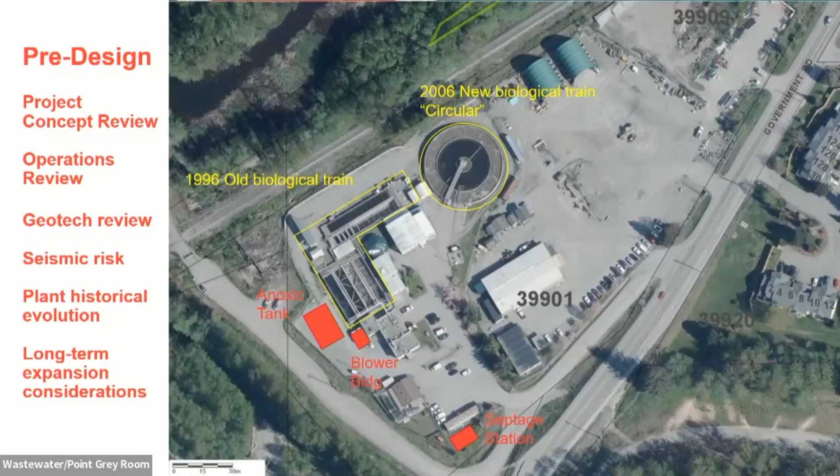To summarize, out of all that preliminary design work, these are some of the conclusions we came up with: there were many expansions over the past 50 years, and creative engineering solutions by various designers were employed to reuse infrastructure and adapt it at low cost. It was very creative, but as a result it ended up with a real patchwork of different systems that were hard to further expand.

Also, there was quite a large turnover of district staff within the engineering group and operations group, even within our project scope period—two senior operators came in and left, which makes it challenging with turnover. We also identified that the existing project, the anoxic tank, carried a number of concerns, and maybe it wasn't the best approach to take.

Finally, seismic liquefaction is a significant concern in this plant area. With the new building codes and seismic conditions, it drove some decisions that were different than what was originally envisioned in the detailed design project.

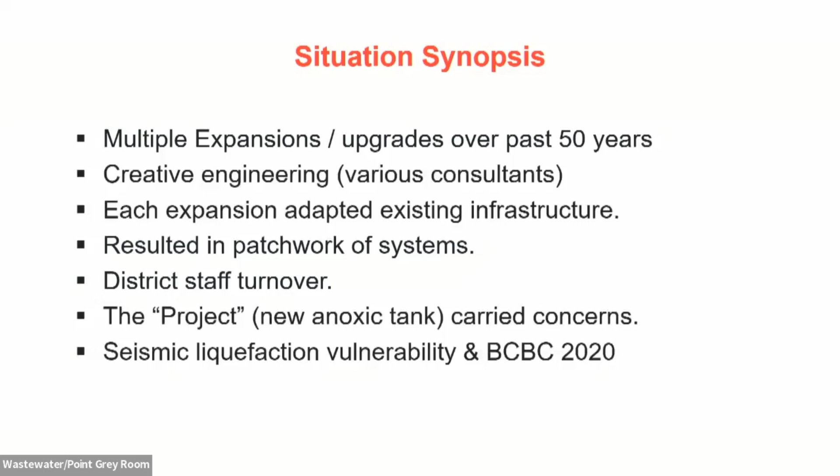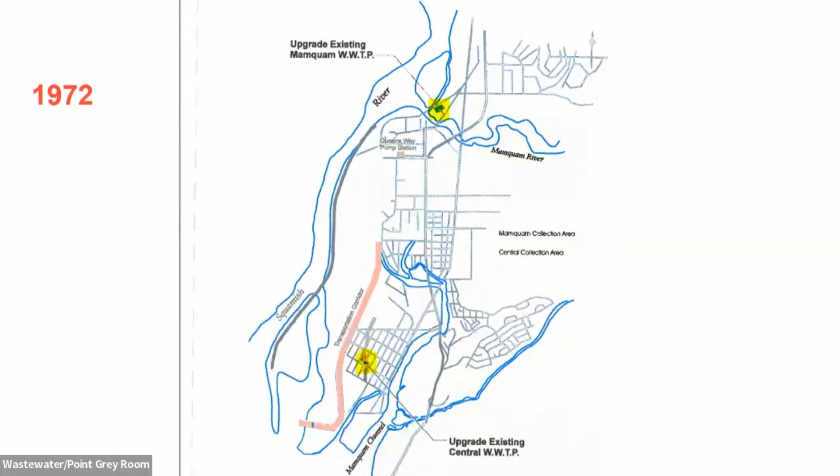I'm just going to take you through a bit of a history lesson of the plant that we unearthed through the investigation. Back in 1972, the district had 2 treatment plants, one at Central downtown, and one up at Mamquam. The Mamquam plant is the one we're talking about in this assignment.

Both original plants were similar to this one here at Mamquam. It had an aeration tank fed by a screw lift pump station. After the aeration tank, it went to clarifier cells and then to sludge digesters on the outside. Sludge went to a sludge drying pond, and the effluent went to a chlorine contact tank and then out to disinfection. The control building was located here, and that was how the operators kind of managed the facility.

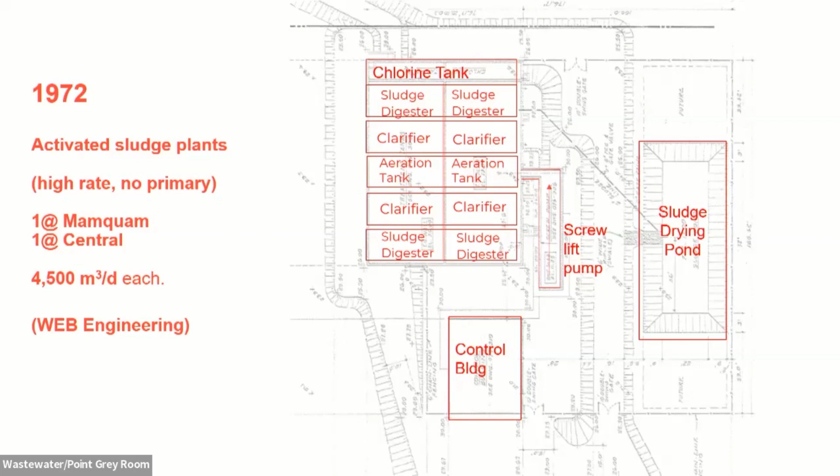The plant was rated at 4,500 cubic meters a day, and this operated for quite a number of years in both those facilities.

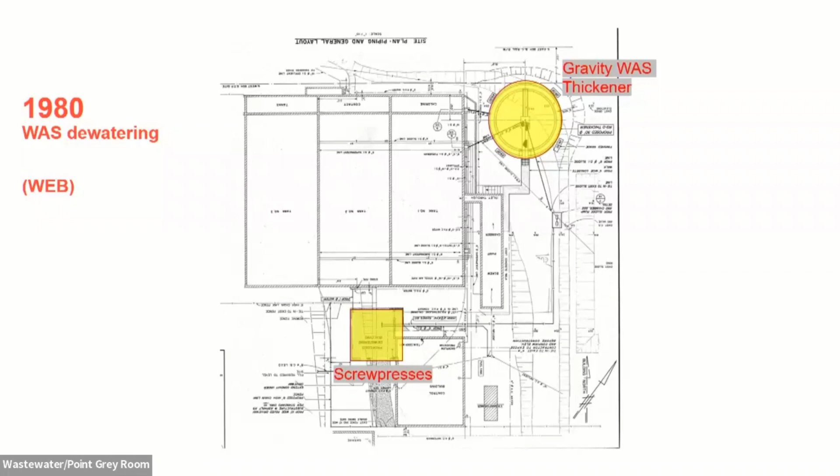Then in 1980, the same engineer that designed the original facility did an expansion upgrade - well, it wasn't an expansion, it was an upgrade. A gravity thickener was installed up in the right-hand corner, and a screw press was installed, so the sludge was thickened and then dewatered with the screw press.

Then in 1996, another consultant got involved in a capacity upgrade. At that time, the original treatment tank that was here was totally revised to become just aeration tanks, and new clarifiers were built up across the top.

The control building was added to with another part for the electrical components, and this part was raised because it was discovered at that point that the flood elevation was actually higher. The screw lift pump station was converted to a screening and grit removal facility.

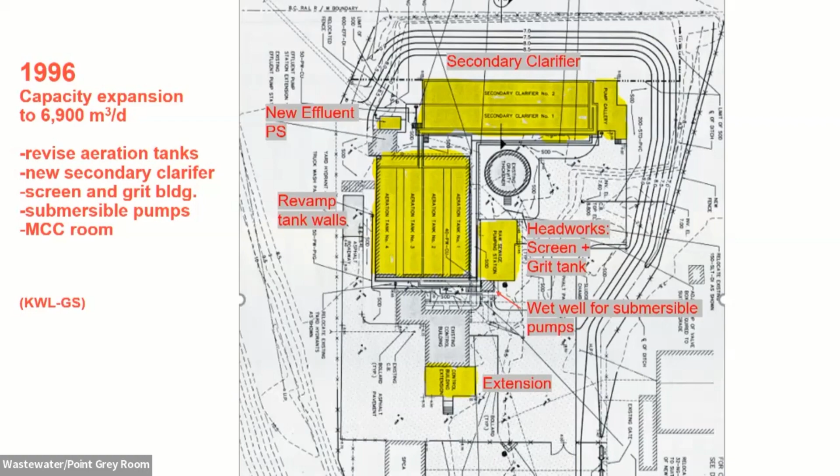Just to illustrate some of the innovative work that was done, this here was the old screw lift pump station - here's the bay for where the screws were. This was modified so that a submersible wet well was put here and a submersible pump was put in.

It pumped the sewage up to the screens at the top level of the screw lift pump station, went through the screens - there was one duty screen and one manual bar screen - and then came out a new channel that was built on the side of the building to bring it back to the aeration tank.

Along the way there was a grit chamber right here, so it came out through the screens, out to the grit chamber, and then out to the aeration tanks.

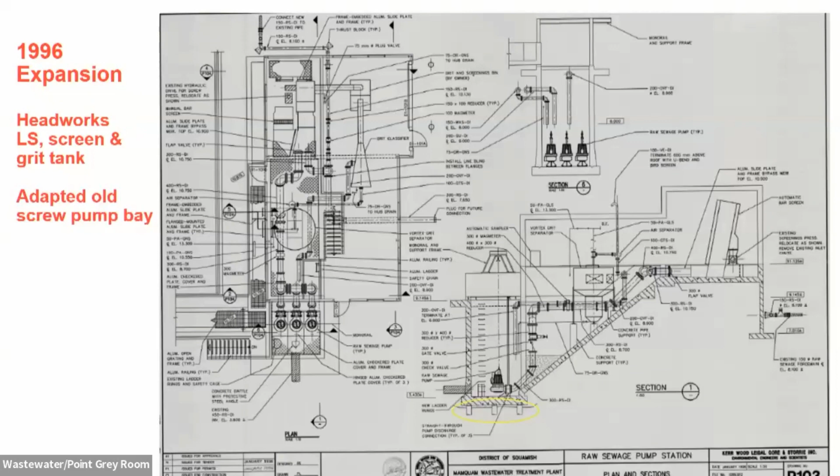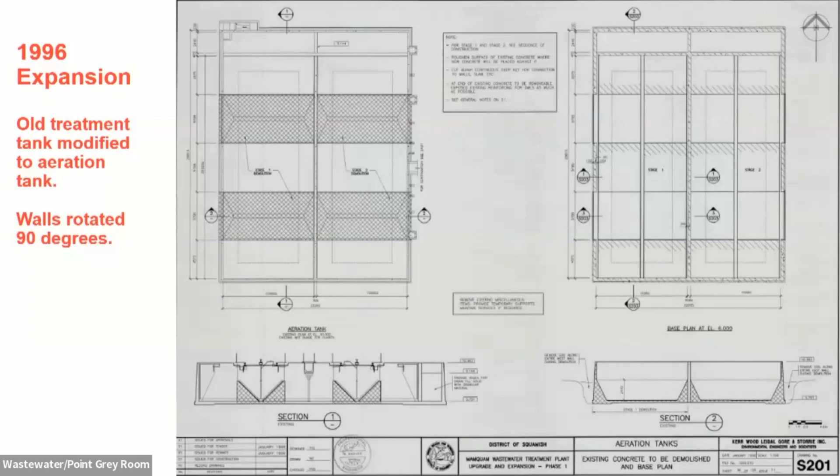These aeration tanks are modified - it used to be combined treatment with the aeration and clarifier. The clarifier had these benching bits of concrete, and those were saw cut out. All the horizontal walls that went this way were cut away, and new walls going in that orientation were built. So that aeration tank, 50 years old, has been modified considerably.

The concrete was getting towards the end of its useful life, and it was designed to a very different standard 50 years ago than the standards now for post-disaster requirements.

So the original concept of adding a new anoxic tank to work with that tank had some questions in it. In addition, the secondary clarifier that was built in 1996 would have had to be retained in order to fulfill that concept.

There were even greater problems with retaining the use of this secondary clarifier. First of all, it was a very shallow clarifier in a rectangular shape, and it didn't have good flocculation, so it was more suitable as a primary clarifier really than a secondary clarifier.

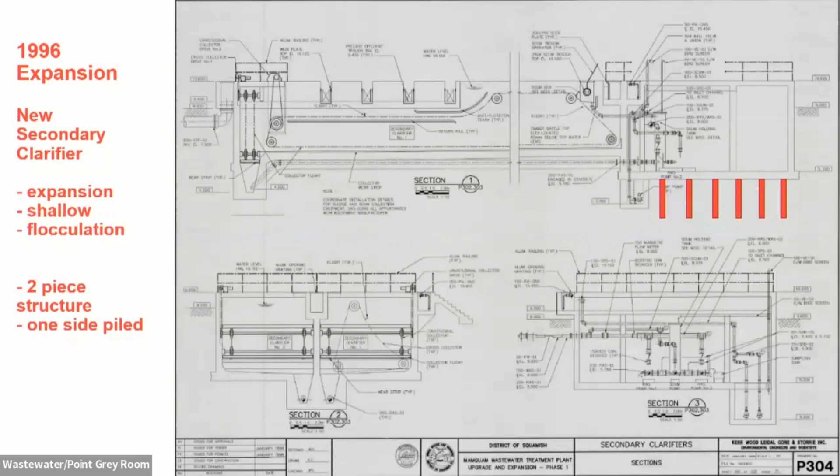But the other half of the tank is just sitting on the soil, and it's connected by a piece of rubber. So in a seismic event, one piece is going to react much differently than the other piece, and it would most likely split apart. That posed quite a risk in terms of continuing to use this infrastructure.

About 2006, the district undertook a design build expansion. In that project, the central wastewater treatment plant downtown was decommissioned and replaced with a pump station that pumped all the sewage from downtown over to the Mamquam facility, which was upgraded to take a larger capacity.

Back in that era, 2006, the federal legislation that had ammonia toxicity concerns was introduced. With that concern, this new circular unit was designed to be able to nitrify, meaning the clarifier was built with extra capacity to increase the MLSS to have nitrification possibilities.

That one also incorporated a selector zone in the bioreactor. A selector zone allows you to create organisms that settle better. Through the use of an anoxic zone, we pick the bacteria that want to settle well and avoid filamentous organisms, and that worked quite well, so it became a favorable approach to continue using going forth.

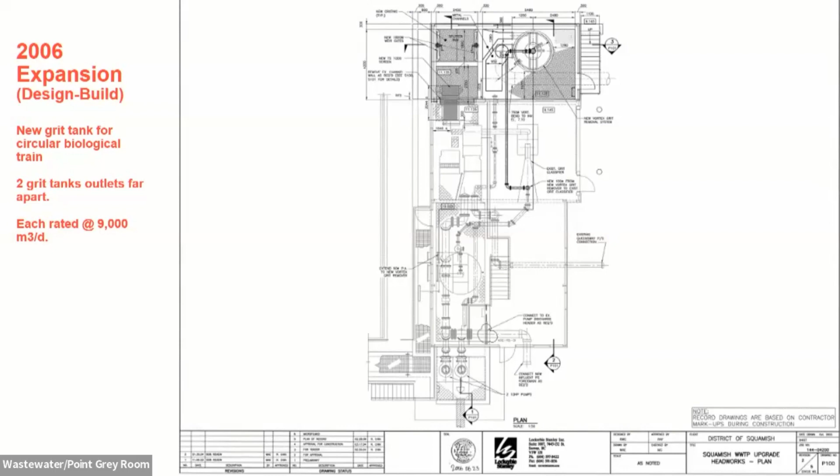In subsequent years there were other upgrades done. The last one, this upgrade, was done by a design build team, Lockerbie Stanley, and it was rated for 9,000 cubic meters a day.

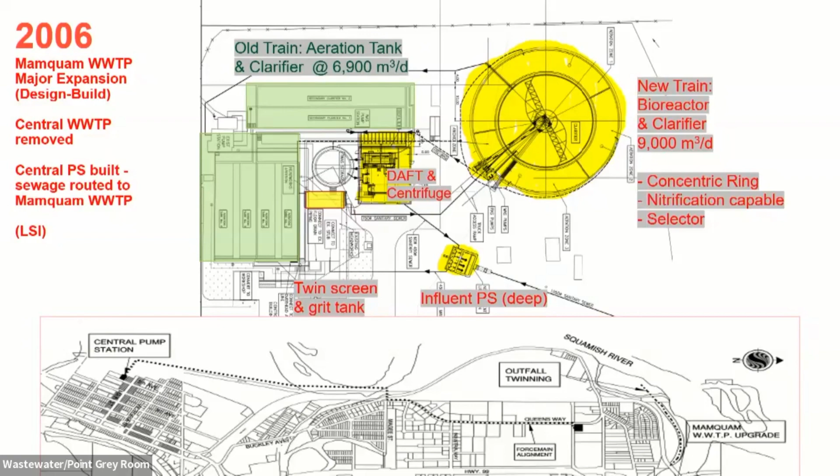Just comparing the footprint, I wanted to highlight that the new yellow is 9,000 cubic meters a day versus the green there, which is 6,900 cubic meters a day. It shows some differences in footprint using superior technology, deeper tanks, and selector technology.

Then a number of other upgrades took place, done by various consultants. The district put out RFPs for each project, and whoever got it, did it. There was headwork screening, screen replacements, centrifuge replacements and twinning, and UV disinfection.

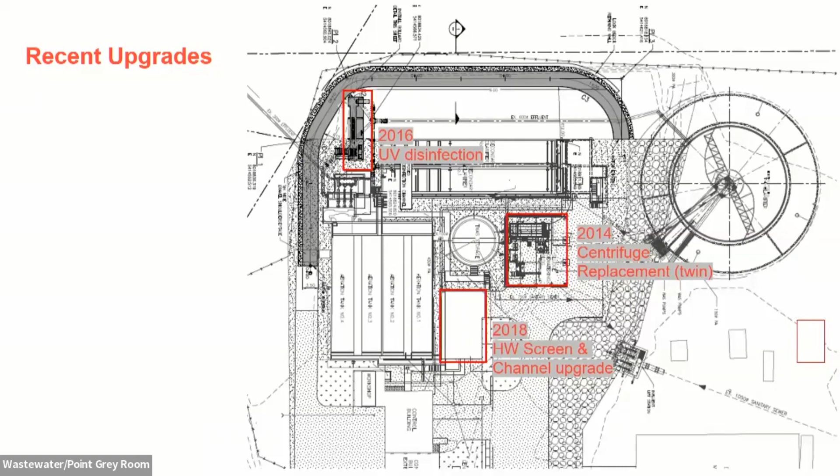Now going back to the preliminary design work of the scope that I got involved in, we did a geotechnical review, did some boreholes, and also reviewed the old boreholes and geotechnical information from the past, which was pretty consistent. There were liquefiable layers within the site, two of them, that in an earthquake situation would turn into mush and cause settlement.

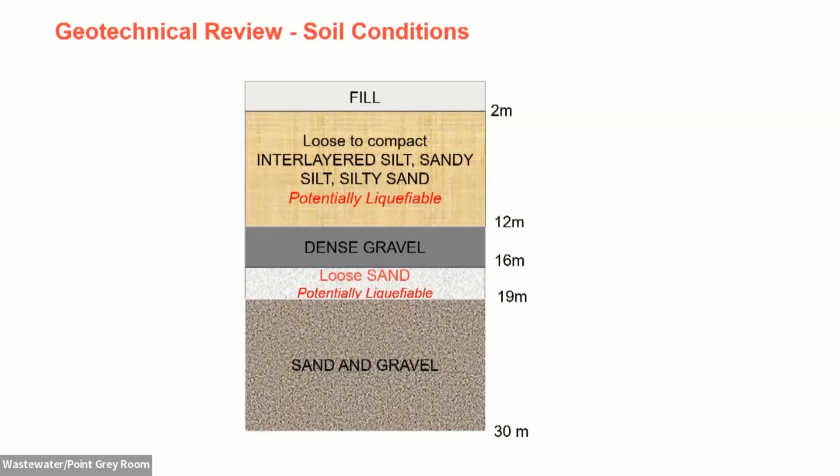This was known before, but back then the design codes were not as tight, so there really wasn't ground improvement done. But at this stage, where the codes really require very small crack allowances in the concrete, we have to go to ground improvement to reduce the movements we need to incorporate.

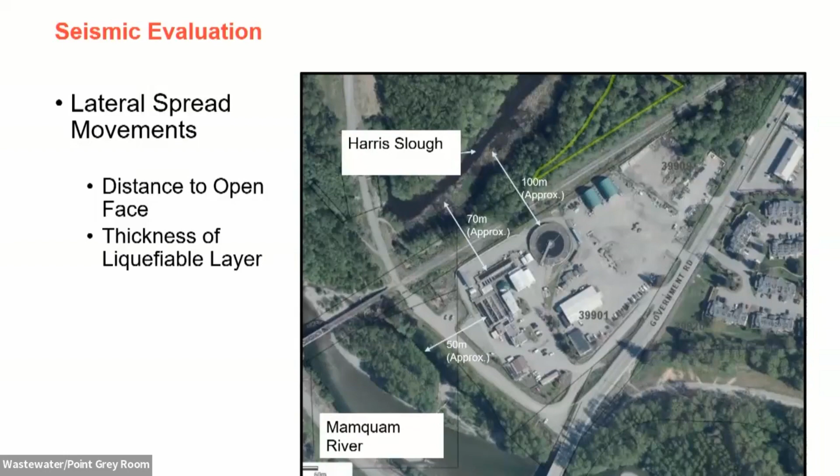We did a seismic investigation of all the existing structures. That meant looking at each structure and predicting how much it might move and what might be the consequence of each structure. That involved looking at the layer of liquefiable depth under each structure, as well as the distance of each structure from an open face. Those were the factors that determined how much movement there would be.

That information was summarized, and we identified some high-risk buildings. The existing rectangular clarifier was one of those high-risk items.

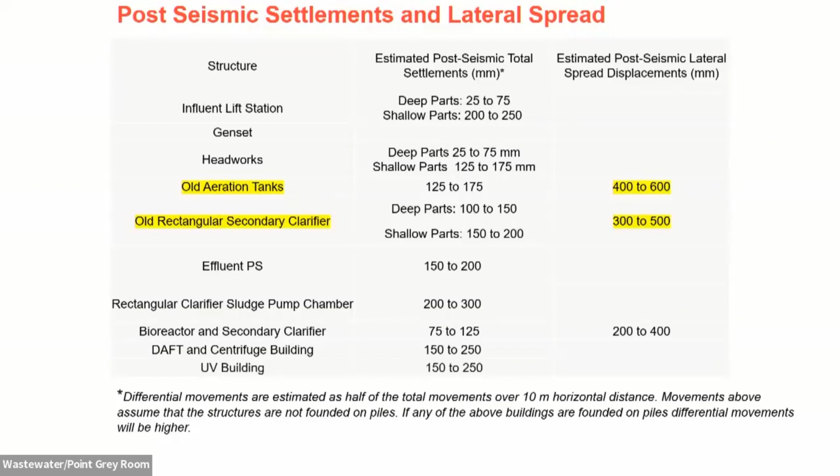So to summarize the pre-design findings, the concept of adding the anoxic tank to the old train really wasn't a good path to go down. We'd also looked at process intensification rather than building anything at all, just taking the old tanks and putting in some media to get higher treatment capacity. But that wasn't a good idea either because of the vulnerability of the existing facility.

The recommendation was to actually build a new concentric bioreactor and clarifier. The plant was happy with how that one was operating and they were familiar with it, so it seemed like a good option to undertake. That new construction would have ground improvements to make it seismically resilient.

But we identified that it would be possible to take the existing secondary clarifier, a rectangular one. While it wasn't performing very well as a secondary clarifier, it was built and paid for, and could be relatively easily adapted to become a primary clarifier.

In doing that, we could get a low-cost way of extending the biological treatment capacity. We would remove roughly 30% of the BOD using an existing tank, and that wouldn't require aeration to degrade that BOD. The settled solids could then be centrifuged directly, and primary solids dewater much better than secondary solids. So that would improve the dewatering of the solids, reduce the amount of polymer required, and give a higher solids content cake to reduce trucking costs.

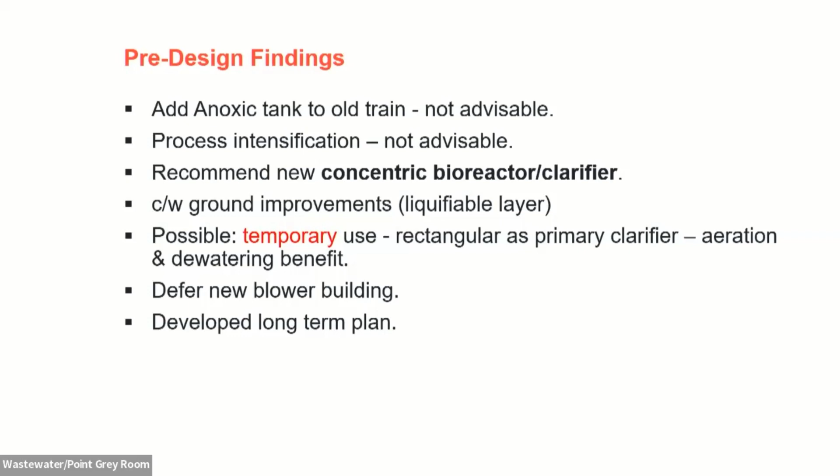We also developed a long-term plan to phase out expansion of how the plant might grow in the future. That's an important thing to do, to look at the long-term growth beyond just what we're upgrading now. So we developed a concept with new primary tanks. The adapted primary was just meant to be temporary usage until they could get enough funds to build a new primary system. In the long run, more of these combined treatment units would be built out, and new influent pumping would be built, and screening, and solids handling.

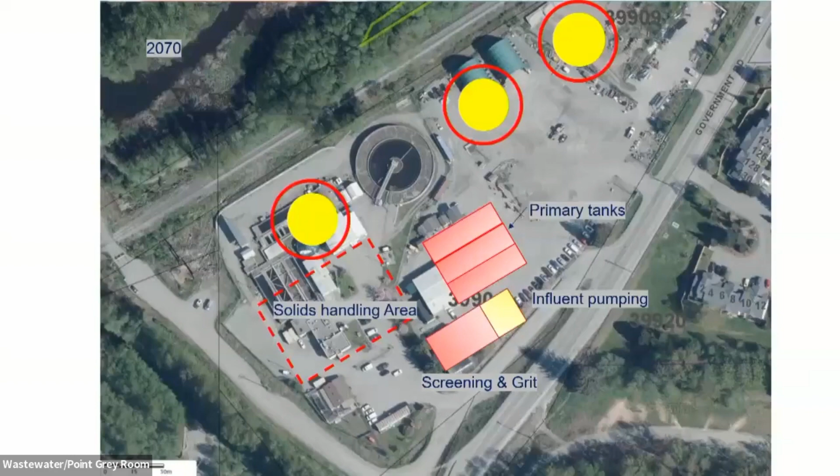So this was a high-level assessment of what could be done to build out the plant in the future, given the site that was available. And the district took that and said, thank you, we appreciate that.

And then, in the words of Robbie Burns, the best laid schemes of mice and men go oft awry. There was another group within the district that had a different project they were looking at, building a new public works building. The different groups were working together, and they decided this was actually a very good place to build a public works building. And due to the hierarchy of staff involved, this project had to give way to accommodate that.

The locations were rejigged a little bit to allow space for a public works building there. The people on the wastewater treatment team, the owners' people, and our team were a bit beside ourselves at this stage, but this is what happened.

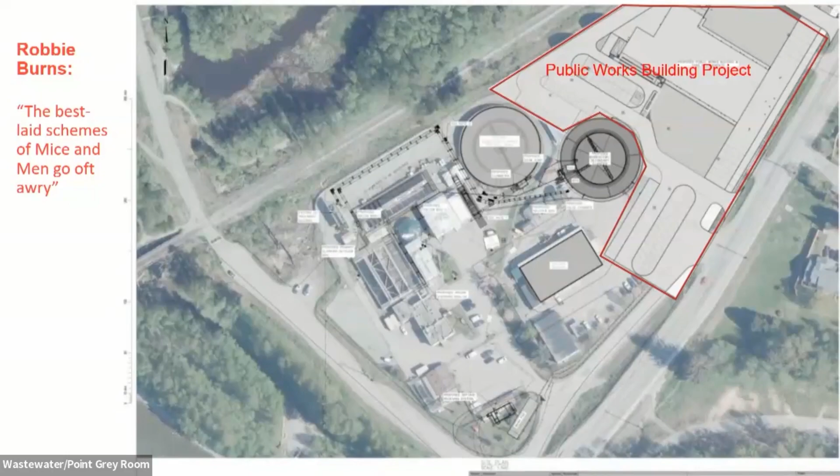So we just went on with our project to try to build out what we had. And as part of that work, we looked at the district's existing data, and we realized that it was all grab samples. So we asked the district to grab some composite samples.

Just some words for operations people: if you're trying to get data to design a plant, grab samples are really not that useful. Grab sampling is like taking a sample every 24 hours, or probably even less than that.

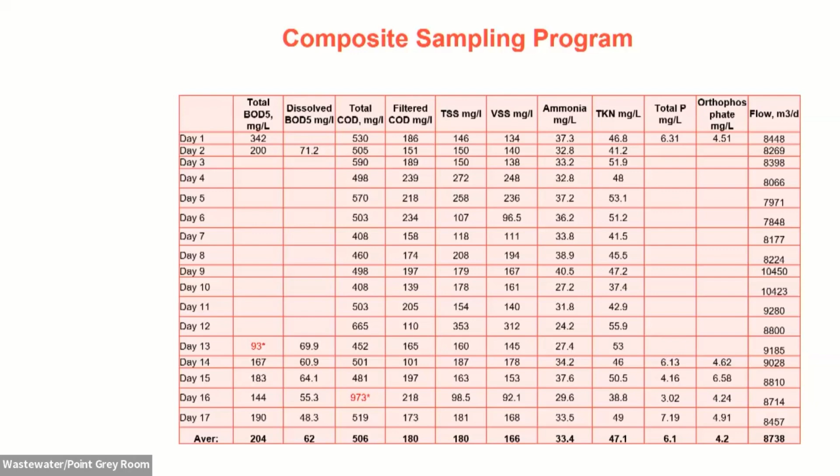Imagine taking a trip across Canada, from the West Coast to the East Coast, with your eyes closed, and one time during the trip you're asked to open your eyes and give a report of what the topography of the trip is like. That's sort of what grab sampling is like. Composite is a little bit better - it's like opening your eyes once every hour and getting data to report what the trip across Canada looks like. But it's better than once.

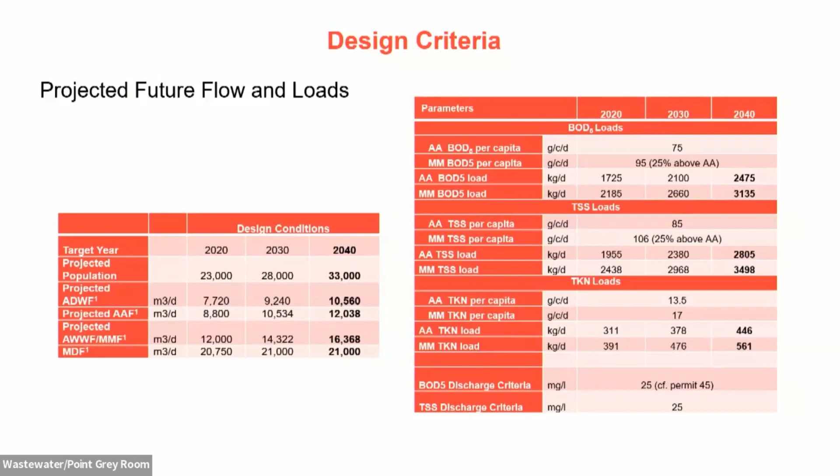We collected some data, and then we took the loadings. We calculated the loadings and divided that by the population at the present time, and then got unit loadings for each person, and projected forward into the future at what the population would be, using the unit loadings to come up with future loadings.

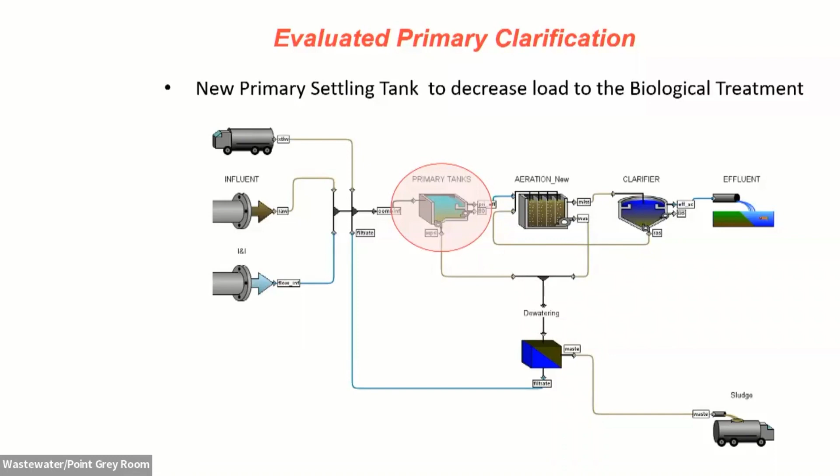We did some modeling to look at the impacts of implementing this temporary primary tank conversion, and saw that the duration of this expansion could be extended much further into the future if this primary was taken.

So then at the completion of detailed design, we thought about the schedule and the sequencing of what would need to be done. Some of the items of equipment had quite long delivery times, and we wanted to compress the construction schedule. We also considered the impact of contractor markups and owner control and decision-making in the purchase of equipment.

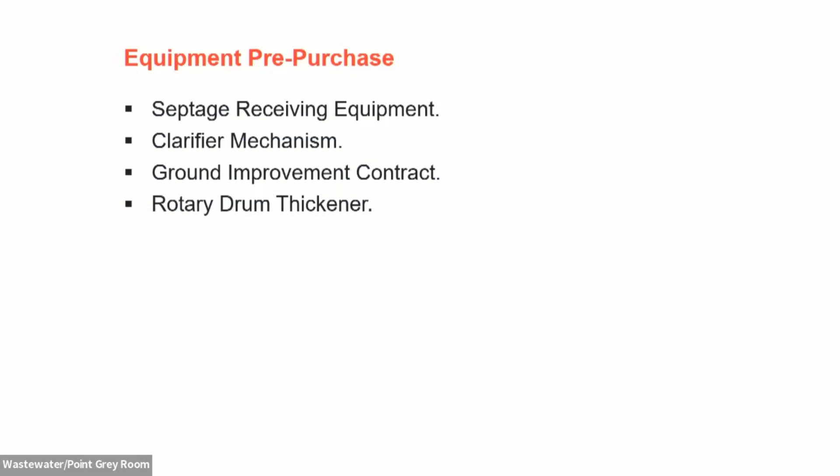We decided to pre-purchase some of the long lead items: the secondary clarifier mechanism, the septage receiving station, the ground improvement contract, and also a rotary drum thickener.

The design for this project, the bioreactor clarifier, was done in 3D design, and we had 20 years of operating experience from the existing plant. The operators had input into what things they liked and what things needed suggestions for improvement on the old ones - largely things around access, ease of maintenance, and avoiding confined space entry.

As part of that, there was a permanent stairway designed to go down into the tank, with openings in between the barrier walls, so that staff could get down in without having to do confined space entry and all that stuff that's required with it. Monitoring, having a guy sit up top with rescue ropes - all of that was eliminated.

Also, the anoxic zone, or selector zone, was replicated here with improvements in the design to make that even better. Walkways were put all the way around the center to give easy access. Launder covers were put into the clarifier to try to reduce the amount of algal growth and cleaning required. Considerable discussion happened between operations staff and the design team on this.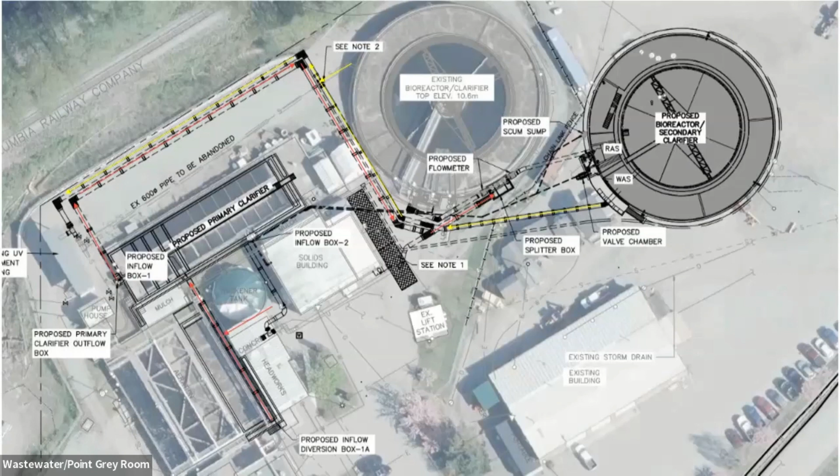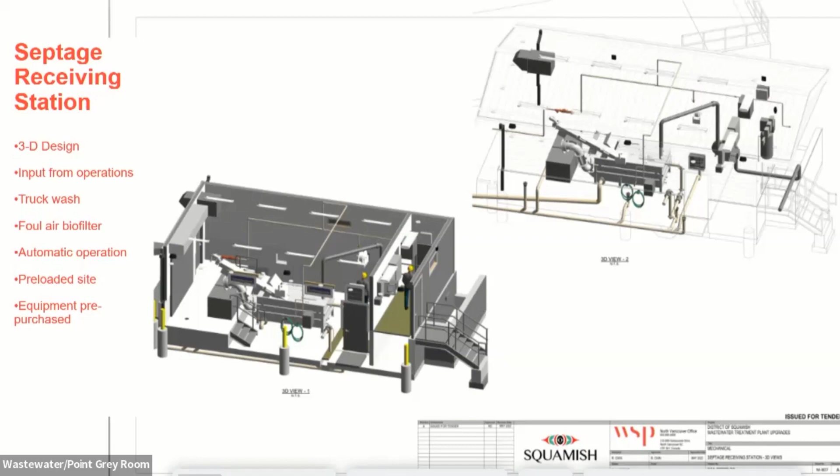The septage receiving station is also just done in 3D design with input from operations on how to make it easy to operate, self-operating, and also with odor control. There's a biofilter, a wood chip style biofilter, located here.

Provided some architectural renderings so the owner could get a glimpse of what it would look like.

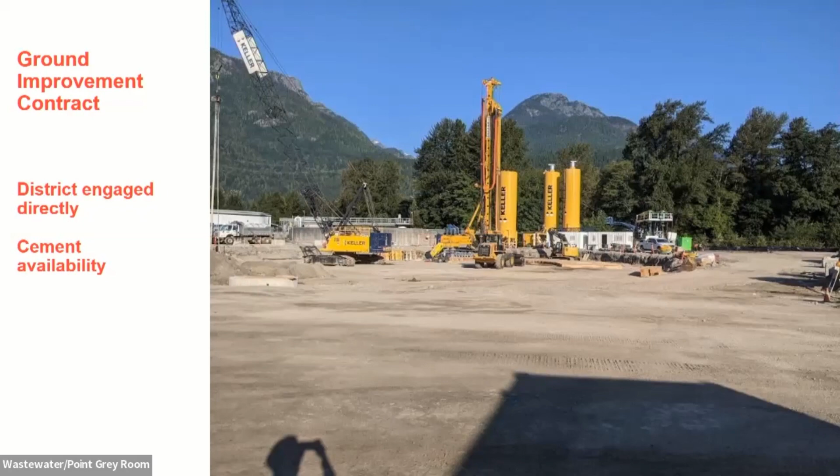So the ground improvement contract was done last summer. The district went out for RFPs and selected a contractor to engage on that. This happened during a period when there was cement availability issues, so that made it a little bit slower, but the contractor did quite a good job of doing this proficiently. The design of the ground improvement was a low strength concrete honeycomb structure that went down about 20 meters.

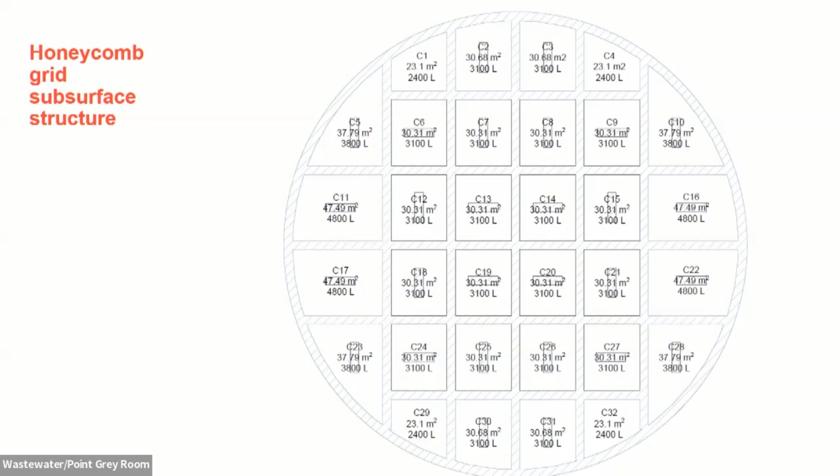This is using a deep soil cement mixer device. There's a number of options for doing ground improvements, and we looked at various ones. Our geotechnical consultant did quite a good job. We looked at other things like stone columns, but because of the nature of this soil, it was very silty. Some lessons learned from other projects: silty soil doesn't work well for stone columns. Like Langley put in millions of these stone columns, and they just didn't consolidate the soil because of the silty nature.

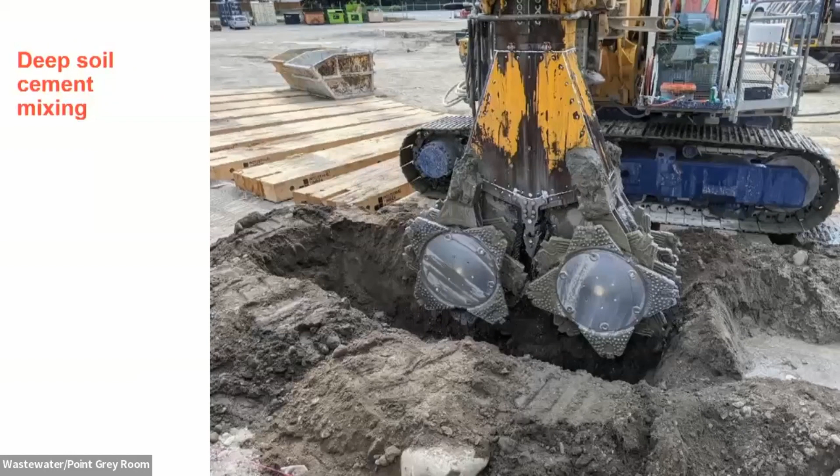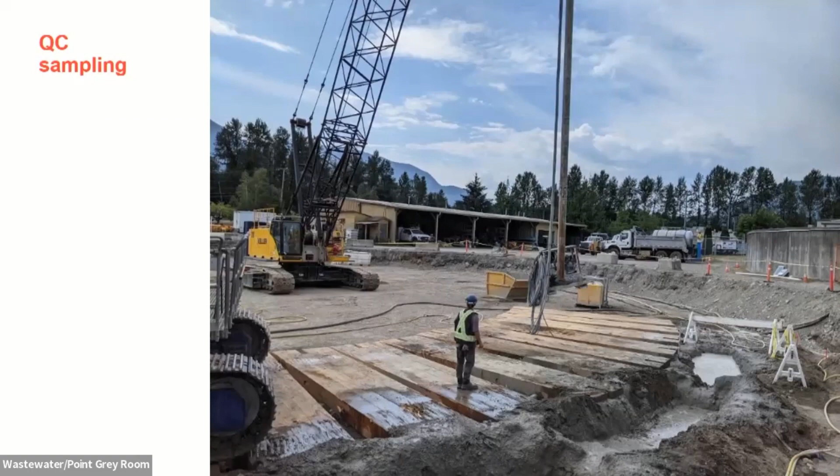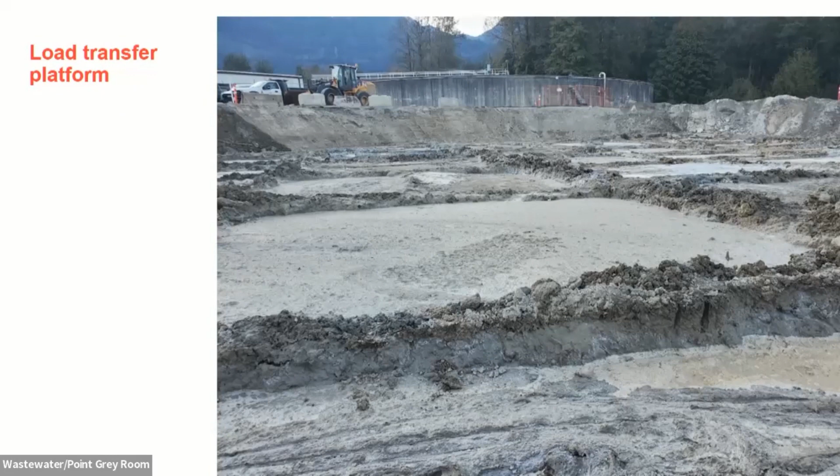So we went straight to a concrete type solution. The soil cutter mixture machine goes down into the ground, cuts a big path, and injects lean mixed concrete on the way down and on the way up. This long probe is used for sampling the concrete column that was created. The strength tests were done. And then on top of all of that, a load transfer platform, like a lean concrete mix platform, was set on top of the honeycomb grid. This would become the working foundation of the new structure that would be built.

So that was all done by fall of last year. And then the main construction contract went out for tender, actually an RFP process, and there were 8 bids received. All of the bids were over the budget the district had. There was inflation and the supply chain issues that were happening. This one was over by about 40%, which was not as bad as some other projects for the district where projects were over by 200, 300%.

But in any case, the project shortlisted the 2 deemed best proposals and started to negotiate with those ones to come up with a scope that could be doable. Meanwhile, at that point, the district had just been notified of a grant announcement, but they were told privately that they were eligible to receive the grant, but they couldn't be announced and no awards could be made. So this further delayed the actual award process.

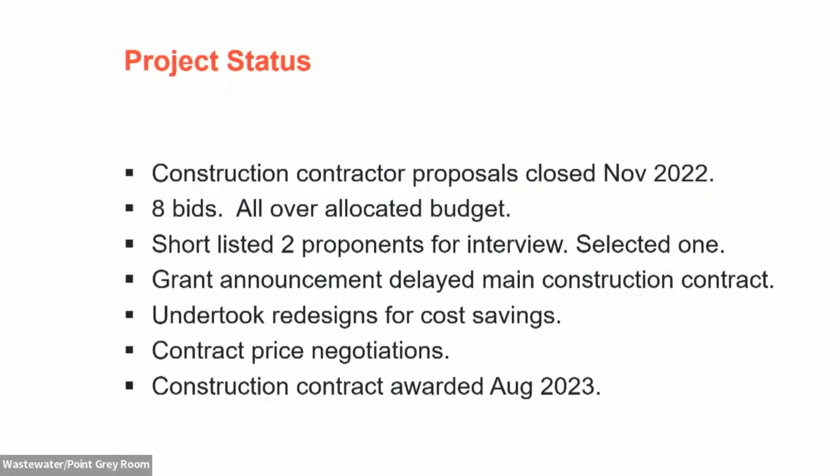And during that time period, we looked at some redesigns to try to optimize the design and reduce some costs. And that went into contractor negotiations for scope reductions and price improvements. And finally, a construction contract was awarded once the grant agency said, okay, you can do that. And that happened just last month in August.

Sorry, so just some lessons through this project. One, plant history, retaining the knowledge of old improvements and records and just understanding of what happened at what period and why. That's very important, that awareness, and often it can be lost, and that sort of leads to new projects being oriented without an understanding of the past.

Historians and politicians would say, you need to know where you've come from, you need to know the past, otherwise you're doomed to potentially recreate problems of the past. And they say that in history on a large scale. That also applies in municipal infrastructure. You need to know what has happened in the past and why in order to plan for the future.

And continuity of owner, staff, and consultants, that's also very important, understanding what has happened in order to chart a path forward. Another point is concept investigation and thoroughness, really thinking through what you're going to do and what will be done in the future. That's quite important in order to define a project that is well thought out.

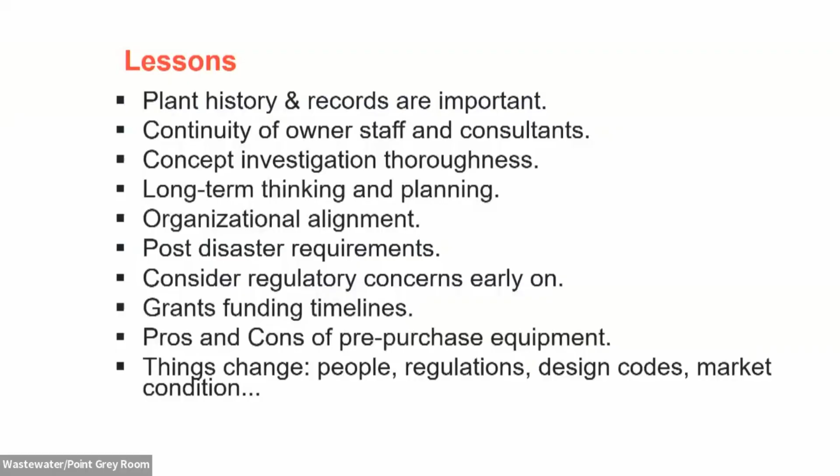So I'm happy to answer any questions that people have.

Hi, great presentation, thank you, great project. My name is Brian Bedford. I'm with Municipal Affairs, and I'm one of the timeline problems because I administer the grant program you're talking about. So I have a point of clarification to make, and I'll get to it in a second.

We have had challenges with our federal partner on timelines. Those are out of the province's control. We do advocate regularly to move them along faster, but it's not about announcements, it's about approval. You can't go forward with a contract before approval. Once approved, you can sign that contract, put the shovels in the ground, and move ahead. You don't have to wait for the announcement. That ends up being a local government or First Nation community choice. The announcement doesn't dictate when you can go ahead with the project - it's the federal approval that sets your eligible cost date. So once you've got that approval in place, don't worry about when the announcement is coming. You can go forward with the project.

Project timelines, grant program timelines, are up front at the application end. We try to keep people informed. Communities can ask at any time, and we give them updates, but the critical piece is the approval, not the announcement.

Thank you for that clarification. And actually, I probably used the wrong word - it was the approval that we were waiting for, or that the owner was waiting for. I recognize there are different parties within the granting agency, and one moved much quicker than the other. We were aware of that. Yeah, thank you for moving quickly on that one, on your part.